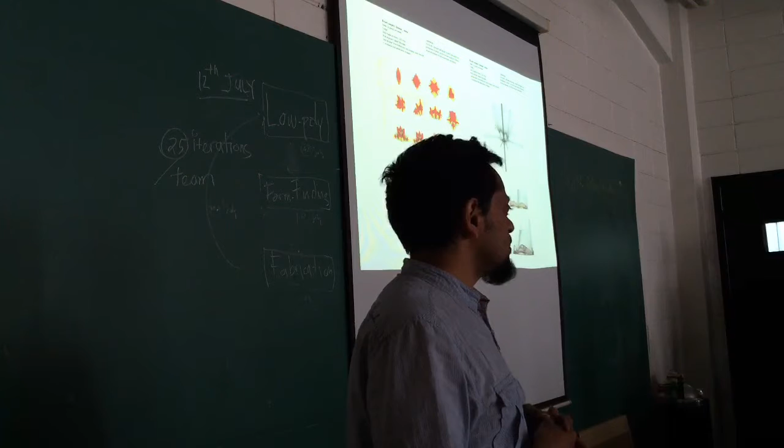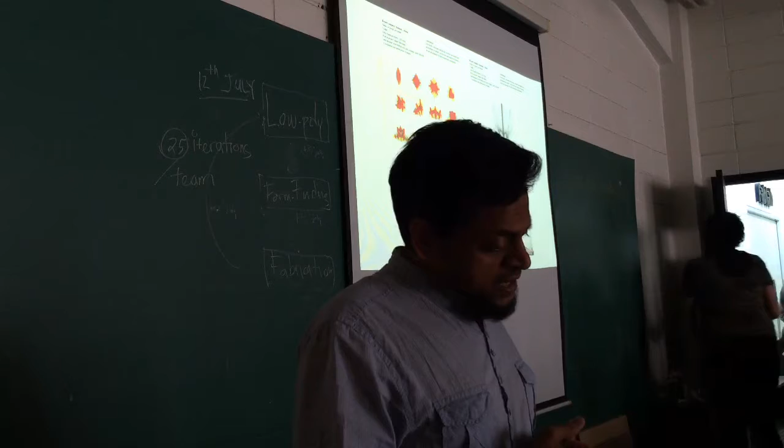So in that sense, it's a big company of smaller companies. Each team is maybe 6-7 people. The biggest team is maybe about 35 people, but they're doing airports and such. So we generally tend to do smaller projects, because we think that gives us more direct control over the outcome. We as in the computation and design group.

So this is what we're currently exploring: correlation of the expressive capacities of geometry with construction and also local materials, and how you can use technologies and appropriate them in different cultures.

I was hired to do a very specific thing, or at least I thought it was specific. They said it's an R&D group, do you want to lead it? Okay. But then the first day in the office, it's chaos. No one gives a shit who you are. No one even tells you where the files are because everyone's so into their own worlds.

So over the last 10 years, every year we think about what R&D means in a company like ZHA, because everyone is a designer, everyone is researching, everyone is extremely talented, from various parts of the world. So whatever little ego you might have had... when I joined, I was 27.

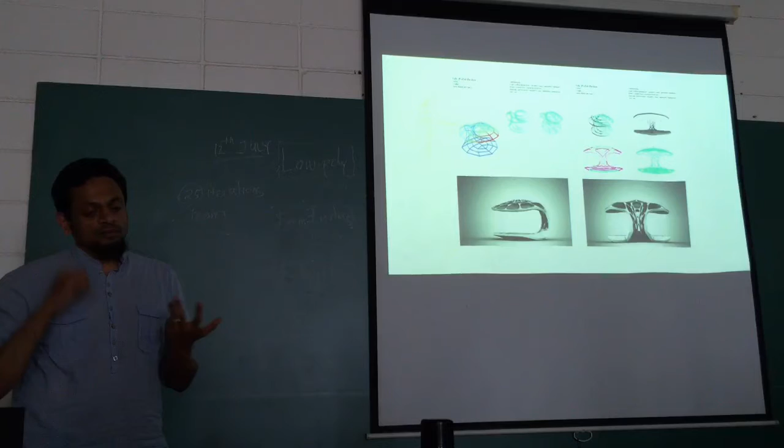Similarly, every other team in ZHA has explored a vocabulary, a method of getting it made, interfacing with clients. Yeah, so that's what I mean, that you join as young people, and over time you try to grow as designers, as architects, and develop your own. And I'm extremely grateful to both ZHA and Patrick and everyone else, in that, as a young untested person from India, there was no reason why they would want to take a risk, but they did.

And therefore the company is rich because of that risk taking, because lots of people have been in the office for 10 years, 15 years, 20 years, in charge of little teams, and that's why the company is diverse and it's rich.

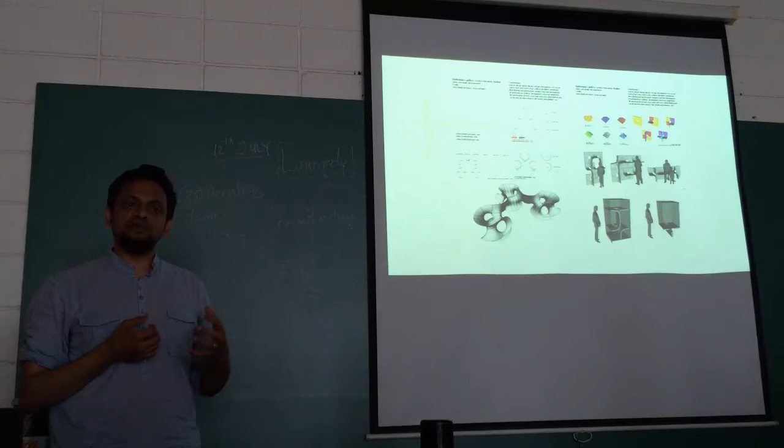Even though in the public eye, in the public image, it's all the same. Like, it's all swoopy things. It's all irreverence to culture. It's not true. That's the image which we have to maintain. Otherwise, people don't take us seriously. If we try to be polite, they will just run you over, right? So we are thick-skinned in that sense, but we're not arrogant, right?

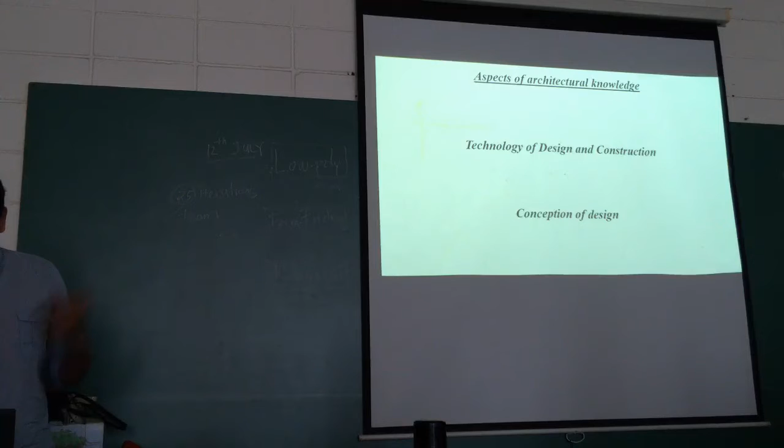Okay, so those are the range of projects that we have contributed to, but our core focus as a research and development team is to concentrate on these two aspects of architectural knowledge: deliberate production of knowledge in this technology of design and construction, like we are doing now, like Maya modeling, Rhino, scripting, programming, all those are design technologies. Construction technologies like a robot, the CNC machine, laser cutter, brick making, all of these are technologies of design and construction.

But we are equally interested in deliberate production of knowledge related to conception of design. So we don't leave it to intuition, we want to talk about it, and initially it will be crude, and then the more we talk about it, the more systematically we can think about design, it also becomes a form of knowledge, right? Design knowledge, how you conceive of design and new novel applications is also a form of knowledge that we try to focus on.

So it's not a geek club, let's say, although we do a lot of technology aspects, we do a lot of mathematics, a lot of art, but essentially we want to be good architects and grow as architects every day. So that's what we mean by technology of design and construction, things that you've been exposed to perhaps more. Modeling, scripting, like Grasshopper, machines, and so on. But this morning you also got a sense of our interest in the other side of things, the conception of design, how do you engage with these things productively to make architecture, right?

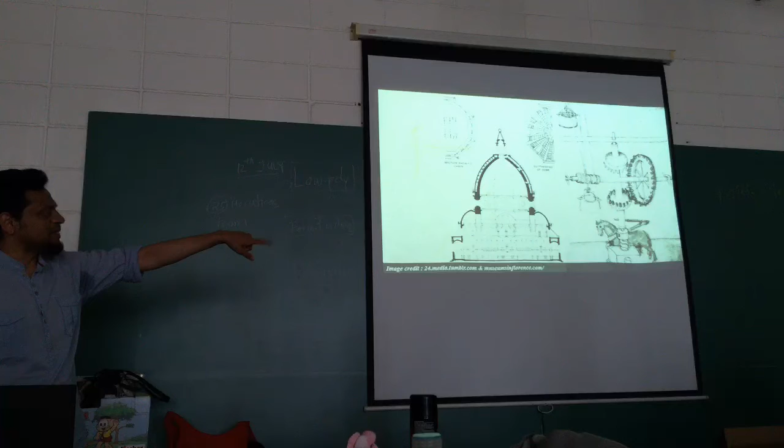Brunelleschi didn't care about styles of architecture, he didn't care about proportion, he didn't want to talk about it, he wanted to talk about how to make stuff. He was inventing machines, he was barely making any drawings, he was on site getting stuff done, and he was not an architect really, he was a goldsmith. And Alberti was kind of the father of architecture, let's say, he perfected the drawing of the perspective, he invented instruments to draw properly, accurately. Brunelleschi famously built this dome, I think in the 15th century or so, he didn't concentrate so much on drawings, but he was very much interested in making machines to enable the easy construction of that dome.

So what he invented there was a gear mechanism so that the horse can go always in one direction, and by flipping a gear, the material can be transported up or down. So the horse doesn't need to go backwards, right? So it's a differential gear mechanism that he invented for the purpose of construction of a dome 100 meters up in the sky. And you can clearly tell this is Alberti, very distinct, and you can blame Alberti for all our troubles of drawing and dimensions, which again we are saying both are important.

More than the drawing aspects, Alberti was also very much concerned with the impact of buildings on urban spaces, how putting a building in a public square is different from putting the same building in a lesser public place, and so on. So social implications of building were also important, so in that sense Alberti was a kind of architect's architect.

So more about these kind of distinctions and things you can find in Parametricism 2.0, edited by Patrick Schumacher, and a lot of people have contributed articles to this latest AD. You can perhaps find it online, or I don't know how it works over here. But there are various aspects about these new tools and new ideas of architecture, how various people are trying to tackle that.

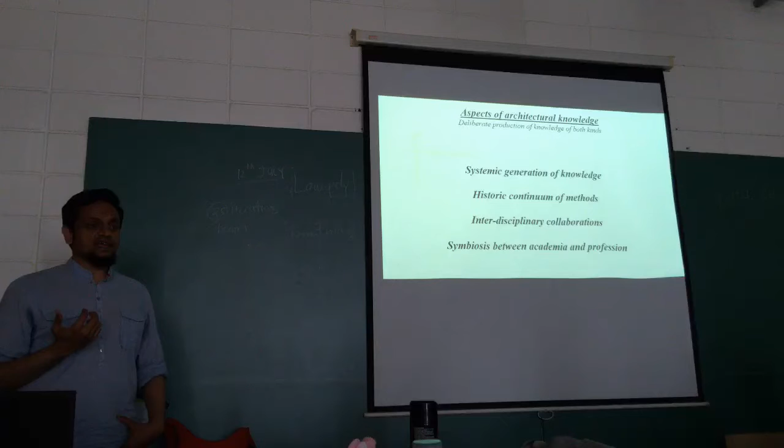So that's a spirit that permeates to a deep extent in our work. That's one of the reasons why we do these kind of workshops, to actively engage, and not only to say, this is one way of doing it, but for both directions. Every workshop we do, when we go back, it does affect things that we do. We can't explicitly say this happened because of this workshop, but over time it does accumulate, let's say.

So systemic generation of knowledge basically is something like this, right? On the one hand, you're producing geometries and spatial ideas by starting with the simplest and then slowly exploring it further and further. And on the other hand, you're also applying analytical methods to understand what you've just drawn. So analysis is not only for you to make a building stand up. It's not the engineer's job only. You as a designer can do that as well.

So you can analyze, okay, I just drew this, how is curvature changing across the surface? You can analyze how is light reflecting off of it? Or what are the spatial opportunities that a certain kind of geometry provides, and so on. So you can then build little tools to help you analyze what you have just done, right? So two aspects of systemic generation of knowledge. You are disciplined in your production of geometry and of architectural design, and you're also systematically improving your intuition by using analytical tools. Okay.

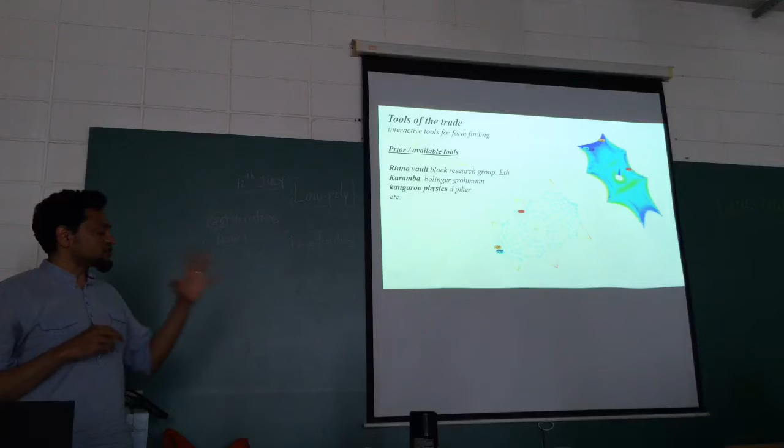Yeah, so some of these things you've already seen. We're interested in new technologies of design and construction. Sometimes we make our own tools, sometimes we use tools that other researchers are making in various parts of the world, Grasshopper, so on and so forth, right? Like this, from ETH all the way to the US. The internet is our world, so there's no point reinventing the wheel if there's already a tool that does it, we just take it and use it. And many times we also write our own tools.

In this case, while we are modeling, I don't know if you can see, but you can recognize the manipulators. While you're modeling the low poly, the simulation runs behind. It's a tool that we wrote, so it's real time, shows you the shape of the fabric. When you press 3, normally what you see is only an averaging process. So we changed the 3 button, so whenever we press 3, what you see is the shape the fabric would take if you stitched it in that way. Okay. So sometimes we make our own tools, sometimes we use existing ones.

So this workflow, you won't find a textbook for this, it's just our workflow. We take a low poly and use the subdivision surface and move the points around until either it becomes completely flat or it becomes like fabric or paper or metal, so we can construct it from fabric or metal and so on. The same way you've been modeling, converting into a high resolution mesh and then cutting it up. Sometimes we add an intermediate step: you convert into subdivision, move the points until some geometric properties are satisfied, which makes construction easier.

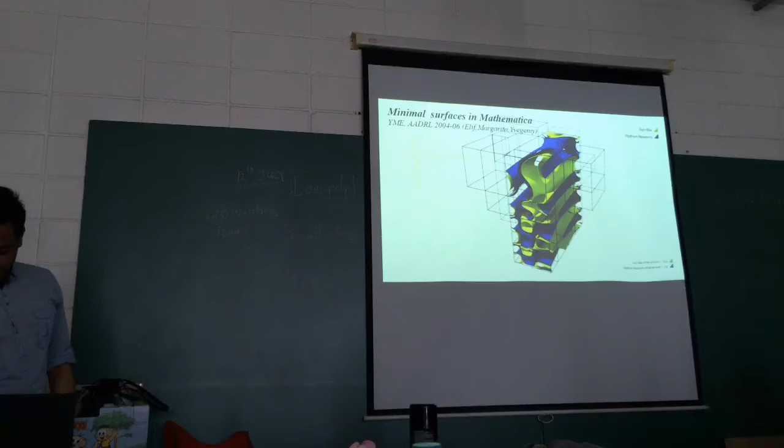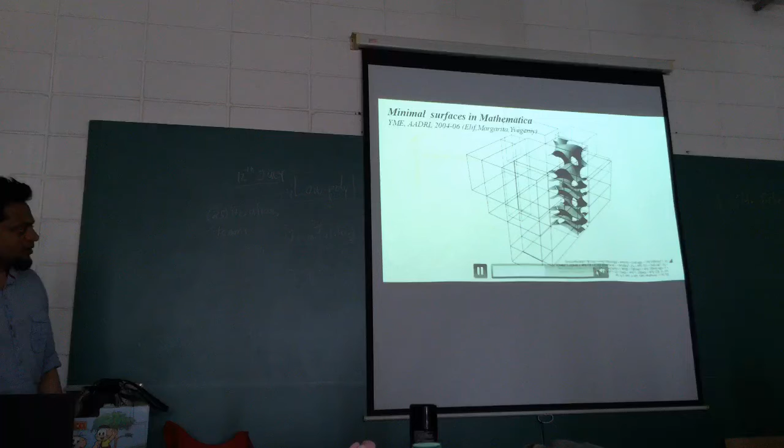Okay, so that's on the side of construction, but we're also interested in understanding curvature more mathematically. So this is a project of my colleagues when I studied at the AA, a team called YME. They were exploring these mathematical geometries and how we can appropriate them to make buildings and so on and so forth. But if you notice at the bottom there's a set of equations that pop up, right? So that entire surface is described by this silly long equation, which is useful if you're a mathematician. But if you're a designer, you're using that as a reference and you model it. Then you understand it the way you understand it. It's the same surface, but you understand it intuitively. So things that you've been doing, like modeling by low poly.

There was another project in the same year, again my colleagues at the DRL, at AA. They said, no, we don't understand the equations, but we can generate equally fantastic surfaces, crazy, just by modeling in Maya, and that's what they did. So lucky enough for us at ZHA, these two teams had already done it in 2006. So we combined both of them when we had to design the gallery for mathematics in 2014. On the one hand, we explored use of the equations to generate all these varieties of shapes, which would be very difficult to model by hand. Here, just by changing some numbers, you get very different surfaces.

But it's very difficult to adjust it to fit a space because it has its own logic. That equation doesn't care whether there is a wall in the middle. It doesn't care if it's 1 meter or 2 meters less. But we, as designers, have to care about that. So that's why we combine these two methods. One is used to explore, the other is used to make it specifically architectural, right?

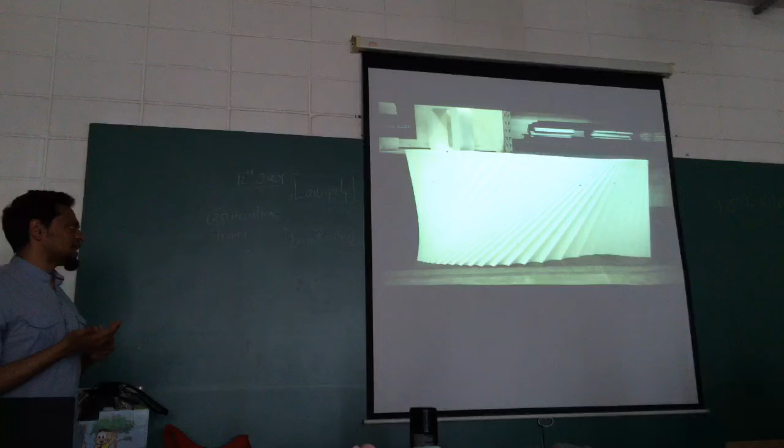What we are interested in is what can that process give us as designers? How can we manipulate that process? How can we understand that process so that we can design better? So, how can we gain an advantage against Fosters, for example? The more we know about the process, the cheaper we can make, in one sense. On the other hand, we can do more, we can express more things.

So this is the rough distinction: if you don't have hot wire cutting, the other way to do it is take a mill, a router, and scrape off everything that is not, like a sculptor would. Take a block of stone and chip away everything that's not the sculpture. That's the comparison. If you use a hot wire cutter, the same surface can be cut in 1.8 minutes versus 3 hours and 34 minutes. So the increase of efficiency is, I don't know, 100-fold.

And these are not trivial. This is not our building, of course. This is Snøhetta in San Francisco. All of that facade they milled it out. But with slight changes in that geometry, you could have hot wire cut it. And that would have made a lot of difference, right?

So this is the kind of thinking: if you have control over your geometry, you have control over your expression, you have control over the budget, you have control over how people navigate the spaces and so on and so forth. So that's why we are fundamentally interested in geometry, because that dictates a whole range of other things.

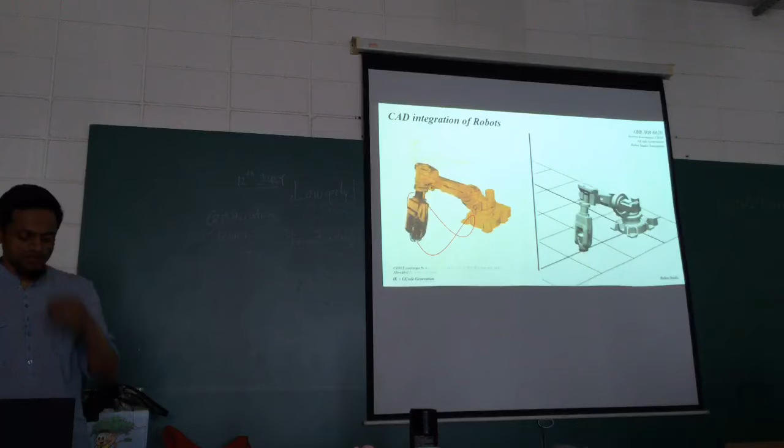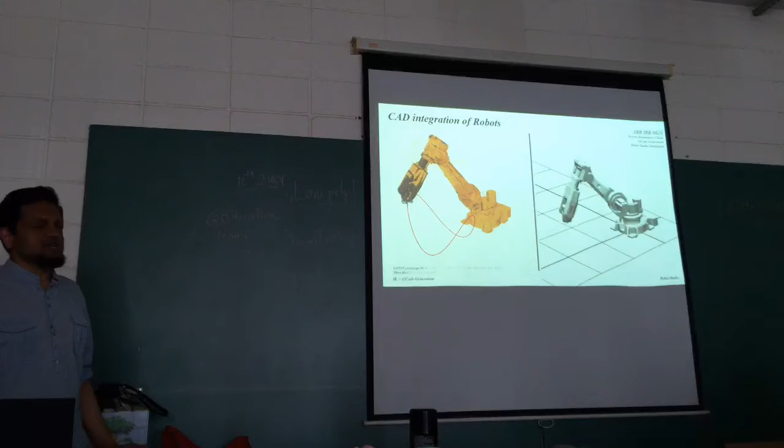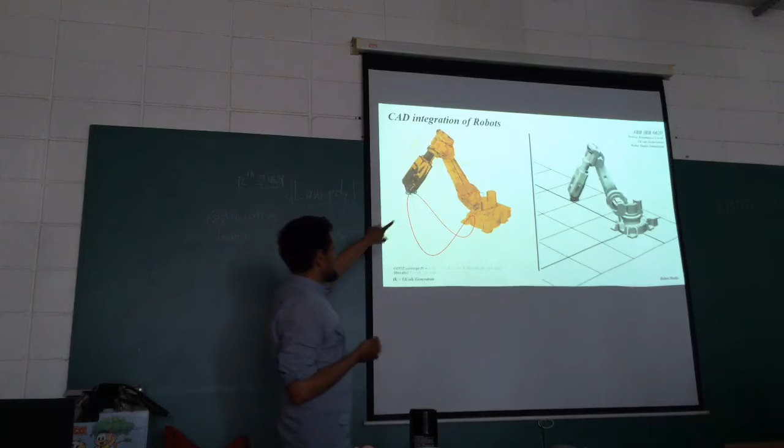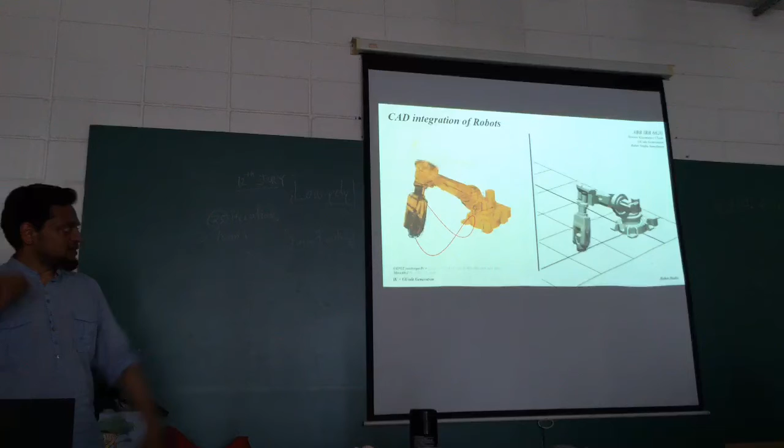So we are also building these kinds of tools, not because we want to do workshops with them, but because we want to know before we send a geometry to companies like Odico whether the robot can actually cut it, right? Every arm, the robot cannot reach every position in space. So if that's the cut we want to make, we want to know how long it will take for the robot to do that path, and so on and so forth. So on the left is our software, on the right is robot software, as you saw yesterday. That's in Maya, and that's in unusable engineering software.

So we're producing these kinds of benches with Odico. This is going to be formed by hot wire cutting foam and then casting concrete onto it.

Casting concrete, every culture is like super experts at casting concrete, and I don't have to tell Brazilians how to cast concrete, right? But making the mold is kind of interesting. You can see here, I don't know if it's visible, there are these straight lines. That's the line that the wire passes. So that's the path of the wire. And you can imagine this surface is a wire that goes and cuts it out.

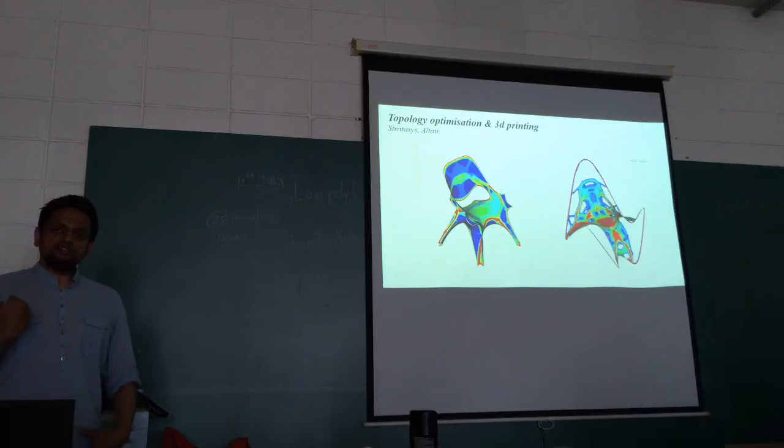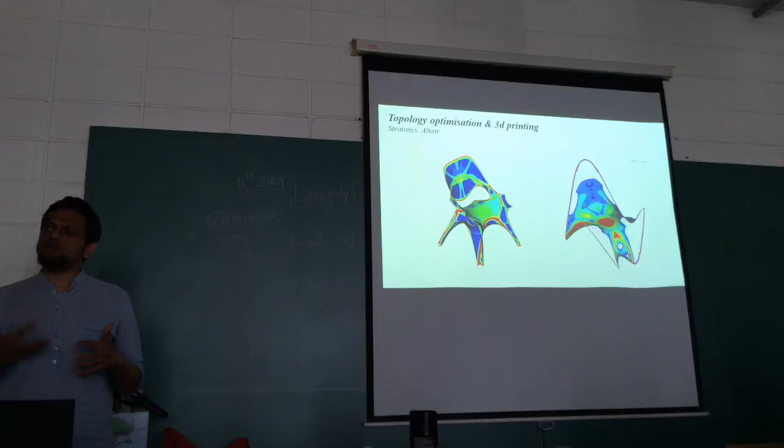So moving on. These are other technologies we are particularly interested in, things that save material. Here, it's a technology called topology optimization. It removes material from where it's not needed, similar to our bones. Our bones are not solid, right? They're thicker in some areas, thinner in others, based on the way you run or the way you walk. So it's a similar technology that removes material from where it's not needed. We develop these kinds of workflows, again within Maya, to convert that engineering information into actual 3D printed parts.

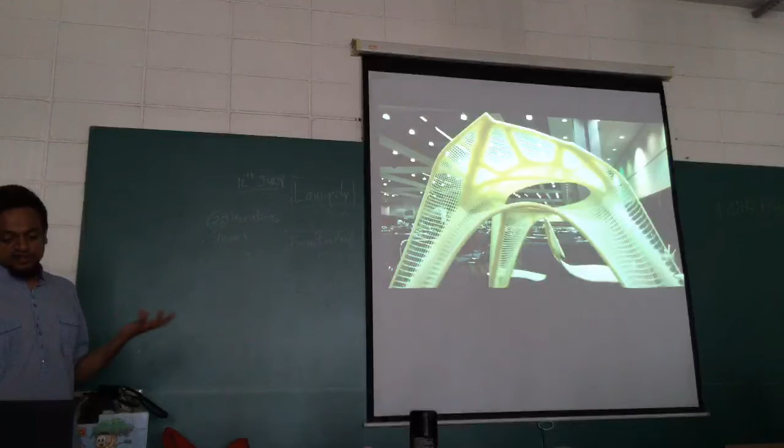So it's still not in production yet. These are all prototypes. You still can't sit on it because there are various issues. But we're already on the 4th prototype. So soon we hope we can commercially sell them. You can't sit on this, that's why there is a tape, if you notice. But we are pretty convinced that we can sit on the next one.

So with 3D printing, you can also manipulate color. The white areas are the stiffest, the hardest, and yellow is the softest. So like bone, it's not all equal density, it's not all equal strength. Some areas are hard, some areas are soft. That's why when you land, when you jump, the shock doesn't go through your body as much as it would if your bones were made of titanium. You would feel it in your skull. Every time you walk, you could hear it in your skull, right?

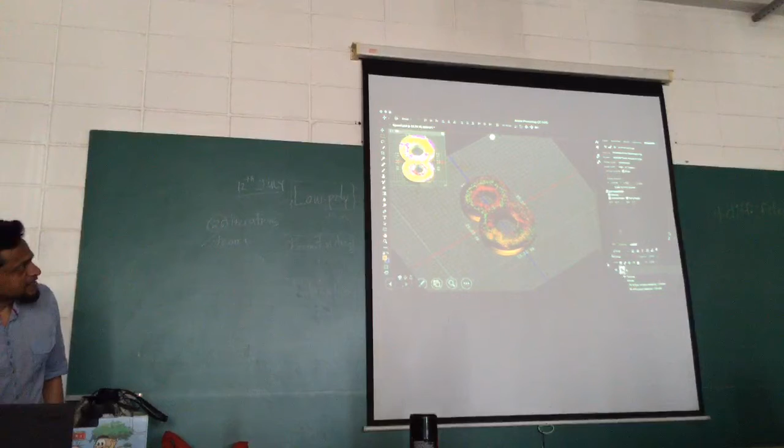From Photoshop, I don't know if you have the latest Photoshop, you can order a print. You can import an OBJ and say, I want this printed, and it will submit a print, and a week later you can get that print. And it will give you a cost. I don't know if you can see very clearly. It will give you an estimate of how much it's going to cost.

I'm not sure if the service is available here, but it's definitely available in many countries, including the US. And that's kind of exciting because you can then make a design and send it wherever, and they can get it printed. Right?

But for us, the interest is it fundamentally changes the way you design. So you're not modeling, you're not simulating geometry. In this simulation, all we are controlling is a density of material per pixel. So what looks like a solid block is divided into very tiny little cubes, and we are controlling through an algorithm whether it should be blue or white. Blue means zero material. White means solid. Right. So you're changing the way you design based on the technology and the way the technology operates.

So, for example, how many of you have done 3D printing with the MakerBot? You have to give it an STL, the STL file format full of triangles, and then it will cut it up into layers and deposit material. So that's a different printer compared to this one. That one needs geometry, this one doesn't need geometry.

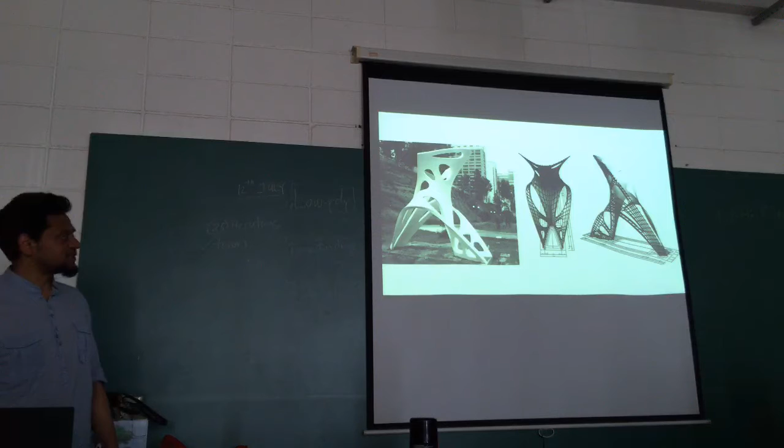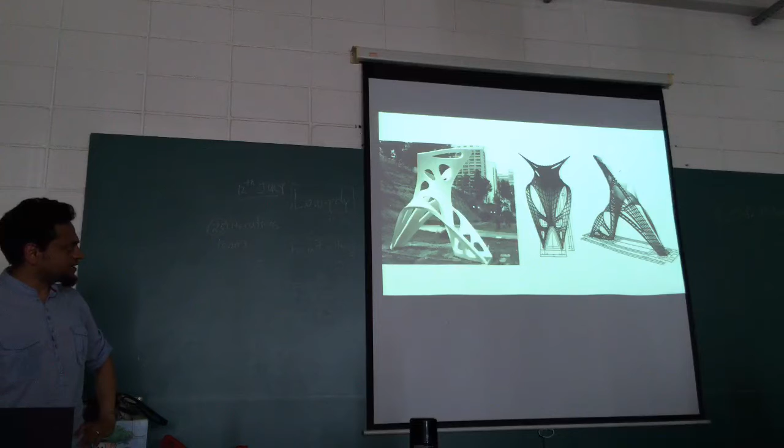Within a week you have something that, touch wood, has survived two earthquakes in Mexico City. It's about 4.5 meters tall, and the foundation is only 40 centimeters deep. Okay, I'll skip through this, this is what we do on a Sunday. But doing that on a Sunday allows us to do this on a Monday.

Because this is what excites us: the drawing, its impact on design outcomes, controlling our geometry, controlling our design output. That's what excites us, but sometimes we have to do things which are not natural for us, read these kinds of papers and try to make sense of those symbols, so that later we can control our design a whole lot more.

So here the tool is very simple. It's a tool that we built: given the red input lines, it produces the black lines. The reason we needed that is to use it as a navigational device in the gallery. The lines naturally lead people through, so you can see the 6 divisions: 1, 2, 3, 4, 5, and 6. You can't see them, but imagine them when it gets darker. 1 here, 2, 3, and the mirror.

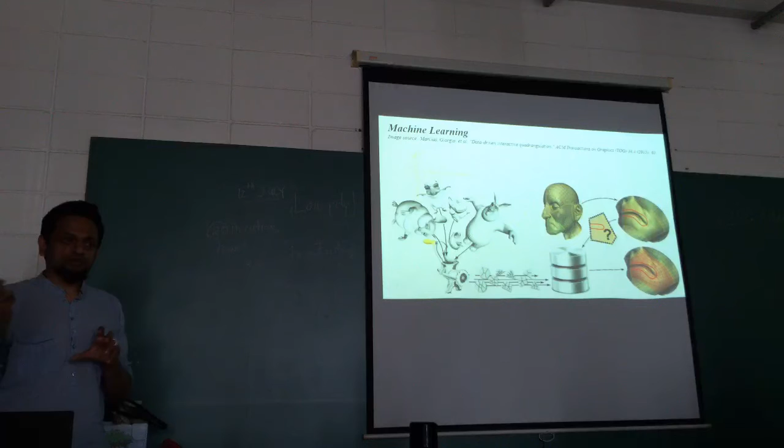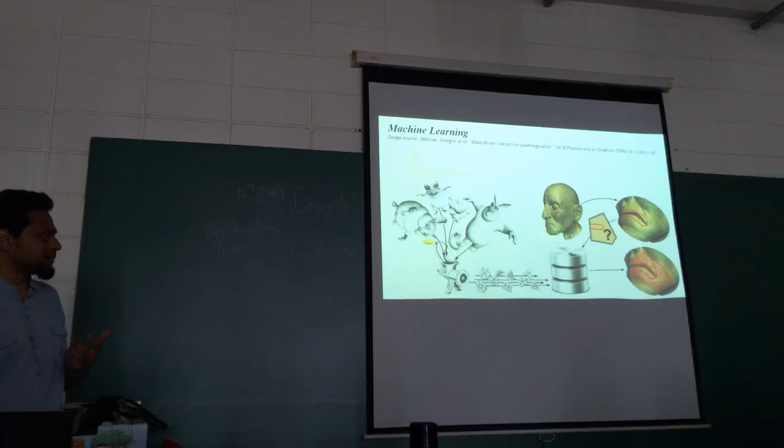You feed the computer a bunch of models that you have generated. It puts it in a blender, analyzes it, and then the next time you model something similar, it will start making suggestions. It's like, this is what you did 30 days ago, this is what you did 5 days ago, do you want to do this? Similar to autocomplete on your phone when you're texting. It's a similar thing, but for 3D geometry. So it's an exciting use of technology that was originally meant for your phone, but applied to 3D geometry. So these kind of 3D applications are of interest for us as well.

All of this, again, is applied to what we are interested in, how all of that helps us design in the virtual world, like with VR. Not only as a presentation tool, but also to explore how virtual spaces can be different, right? Gravity can be upside down, it can be sideways, you can have infinite friction or zero friction. So those are exciting things to do in the virtual space, which you cannot really do in real space. So all of that technological research or interest is ultimately geared towards a design output.

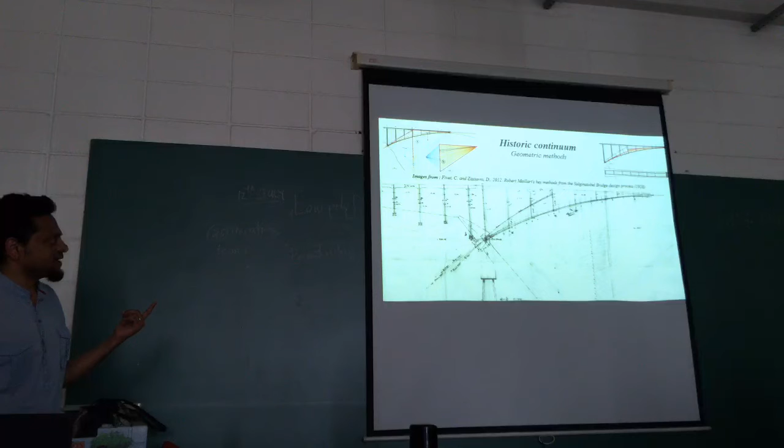So that's more or less the main research trajectories that we've been doing over the last 6-7 years. And other main interests include, as I said, connecting back to historic methods of design. So this is a method of structural design which was used to design bridges like these. But the interesting thing about that is it's not numeric.

It is purely geometric. So if you have a drawing board or AutoCAD or Rhino or whatever, you can design the shape of that bridge and also dimension the bridge accurately with just drawing tools. People like Gaudi also used these. Actually, Gaudi used this method more than he used the hanging chain, because the hanging chain is not easy to calibrate. But this method is very flexible, and lots of designers in 19th century France and also Britain used this graphical method. It's called graphic statics.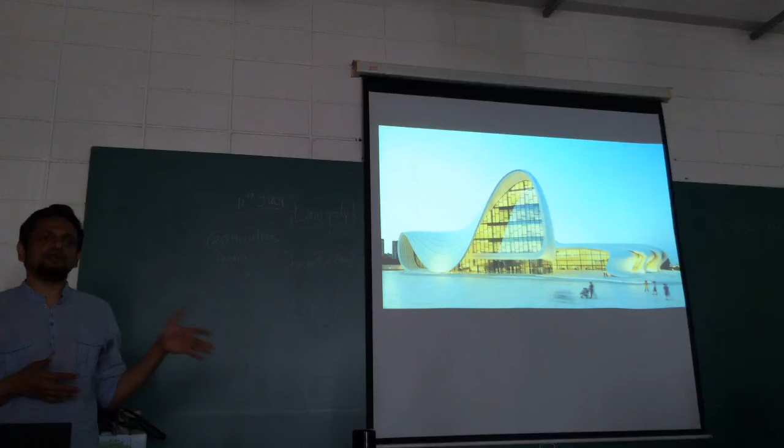Some people say that is old school ZHA, they like that one better than this one, and some people think that's too formal, or this is too formal. Internally, at least for us, it doesn't matter. It's all a continuation of a series of ideas from groups of people who joined the office at similar times, and they grow together, and hopefully in 5-6 years' time they see their first built project. I've been in the office 10 years, I've not seen a single built project yet.

But at the end, in December 2018, our gallery will be complete. So that will be the first complete design-build project. We made partial contributions to several projects, but this will be complete by 2018 or so. You can see that this is a completely different language to this, and to that. And once this is complete, it will be the first major built project for CODE in a sense.

And it's a journey that starts 6-7 years ago, with interest in shell geometry, looking up historic methods of how to design shells, finding other people in the 60s and 70s who did it, including Niemeyer and Dieste or Candela, and how they did it, and so on. It's a very fascinating, exciting world to go into, because we know at some point there will be a built project that represents your interest, right?

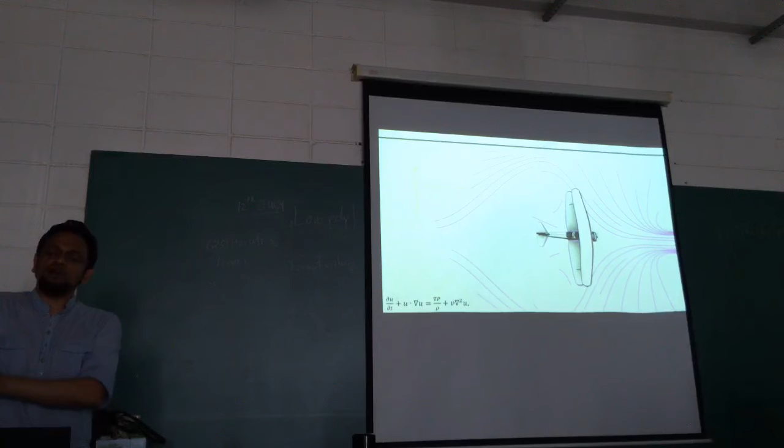Okay. So I will stop for now. Let's just leave this video. So I hope you see value in pursuing something for many years, be it an interest in modeling or mathematics or art or working with artists, or looking at other industries like computer graphics. So never dismiss any avenue. Anyone who's working in any other field, there's something that you can learn from them.

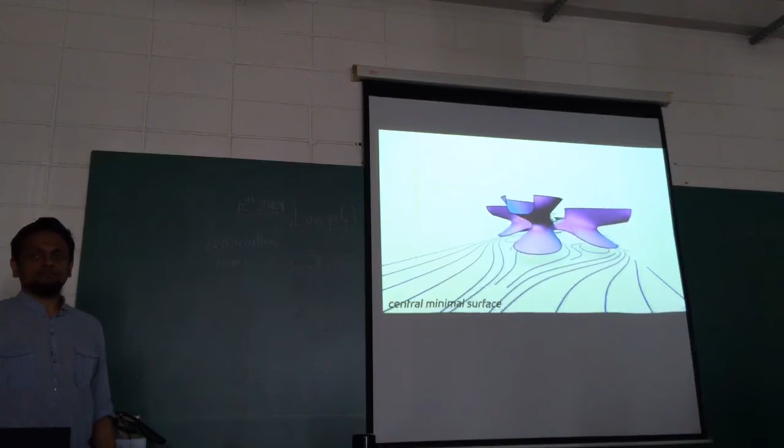And it's not that we had a game plan 10 years ago that we will do exactly all of these things. So every year, this year robots interest us, we will do robots. Next year, maybe it's something else. But the spirit is the same: always be experimenting, always be inquisitive.

And there's no reason to feel that some countries have more opportunities than others. There are different opportunities. So most of the tools that are used in the design of this one you've already seen in the last 3 days. So it's not so much about tools, it's about practice and all the other background research that really makes a project.

And to simulate that material stretching, it's in Maya also. I mean, that's not what engineers use, of course, but the shape that we generate is very close to the actual engineering shape. So it gives us enough of an idea of whether my head is going to hit it or not. So it's plus minus 5 centimeters.

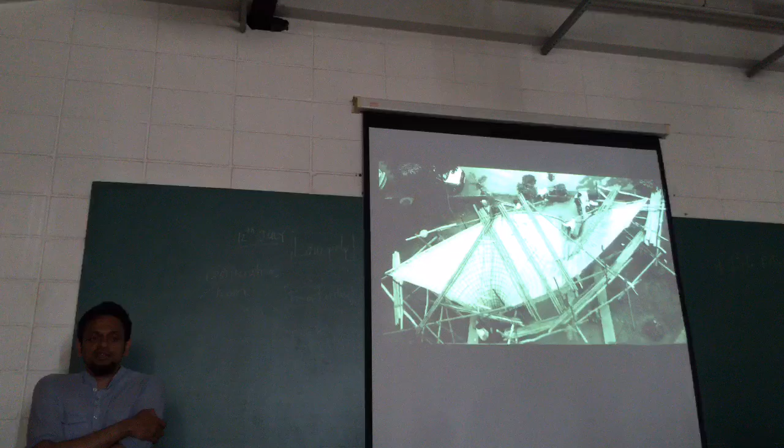But no, once you grow beyond a certain size, it's pointless for Zaha or anyone who runs the company to be involved in design, because you can't micromanage 200 people, or you can't even micromanage more than 10 people. It's very difficult, so it doesn't make sense for her. So she was involved in the overall directions of the kinds of teams she made, and collaborators she brought in, clients.

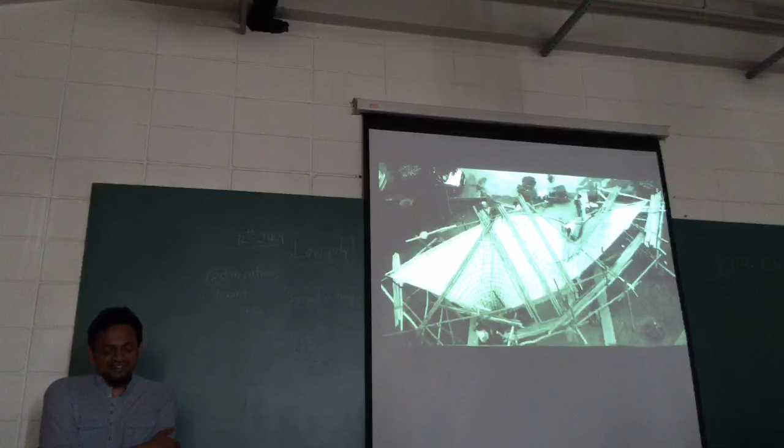She was approving or disapproving? Yeah, she was. In that sense, she was always involved, approving, disapproving projects, or mostly disapproving. She was the spirit of the company, let's say, and not the everyday.

Okay, put some video.

This is a project that we did. So this was a DRL project where using a laser cutter, you remove some material and therefore you can fold it. So it's plywood, right? Or MDF. You laser cut those patterns and you can fold it into different shapes. And then we decided to use that technique, but there was already a company in Germany that does that. So you can fold MDF into these loops by cutting material like this.

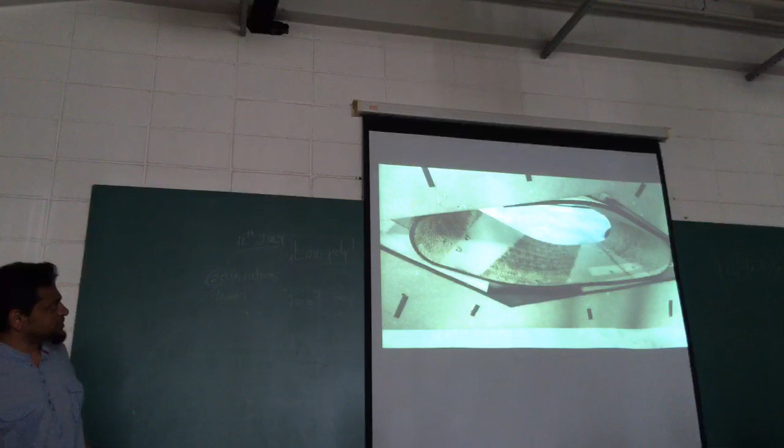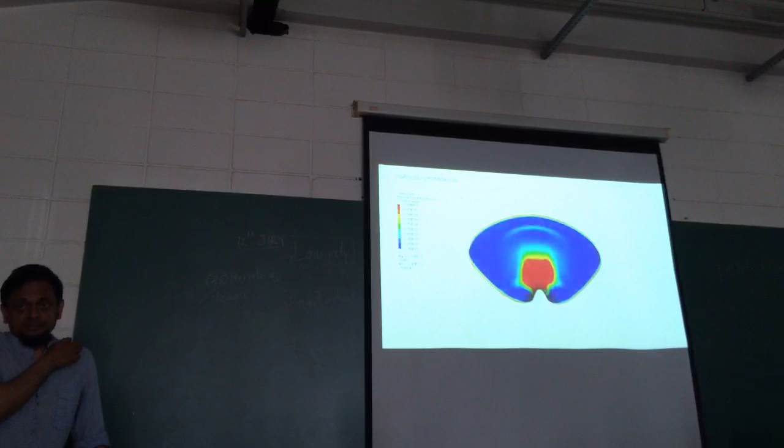And so we used that technique to make all of the loops and join them together. So again, this entire pavilion, everything was made in a laser cutter. I mean a big one, not this same size. So you can see topology optimization just to get the pattern of where the structure needs to be. And then we converted that into a mesh by low poly modeling. In this case, the red represents the most force, the area of most stress. So where there should be structure.

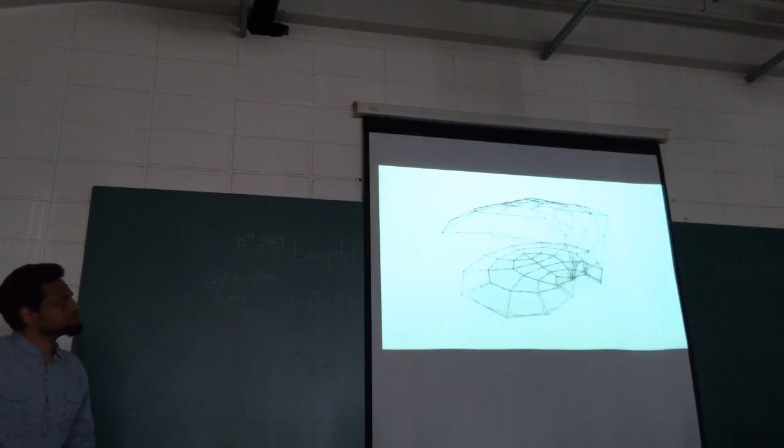And then we made these custom tools so we move the points around until everything is flat, so we can then laser cut it. If it's twisted, we can't laser cut it, right? So then we digitally make them flat by moving points around, and then everything can be manufactured in a laser cutter. Which means you have to unroll everything flat, and then all the boundaries are cut, all the laser etching is done, and then you fold it.

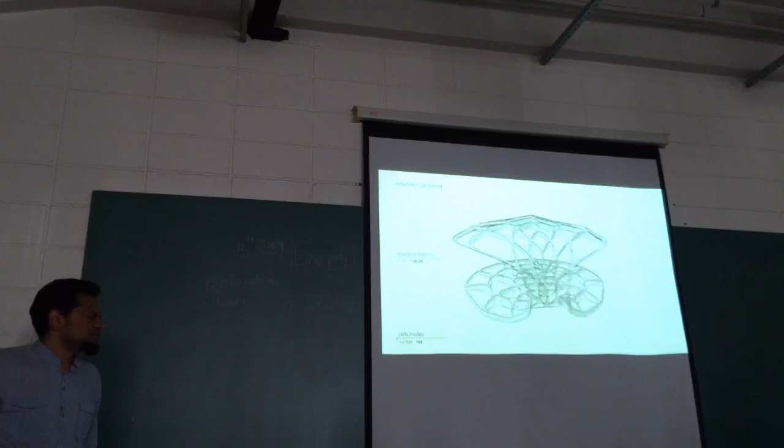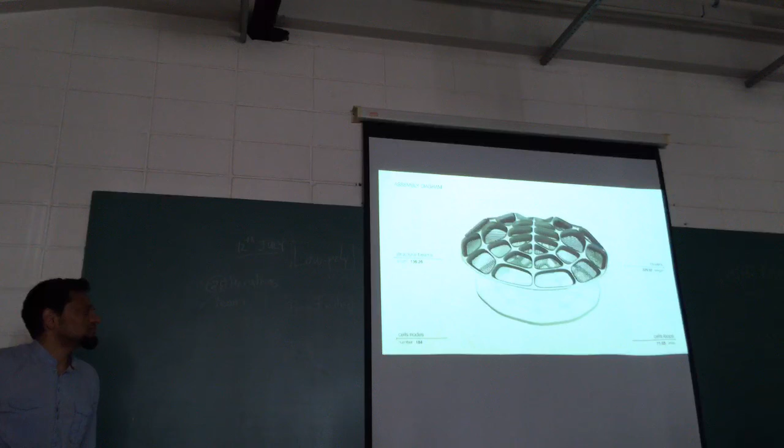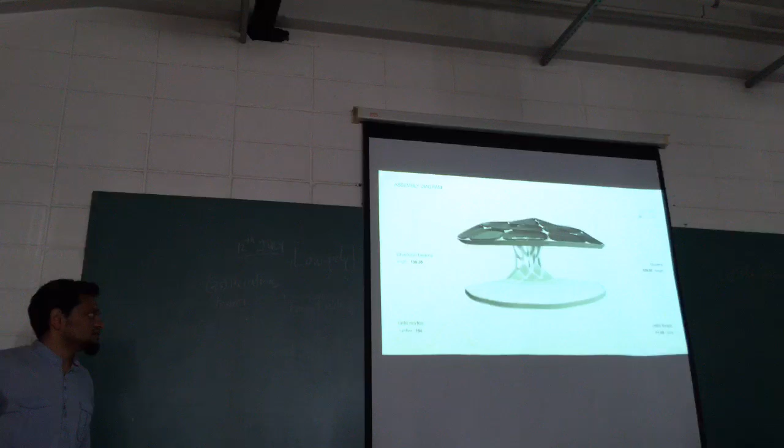So this is the underlying structure made of aluminum box sections. And the loops are made by folding plywood, MDF. And the cover plates are made by folding steel plates, taking flat sheet metal and then bending it. And the louvers are cut again, CNC. The interesting thing about this is that it was one person designing it from our end, and one person from the fabricators, doing everything digitally, and the machine doesn't care. So the assembly was a team of 15, but the design and production team was 2. So you can see all the parts are cut, assembled.

Also, a kind of interesting story. This factory is in the middle of nowhere in Germany. It's a village of 1,000 people. They had space. They bought some machines, and they're doing projects for Shigeru Ban. They're doing projects for ZHA. They're doing projects for really big companies, Jean Nouvel. They bend plywood, they bend anything that is flat. They can bend sheets, metal, fabric. So that's also very interesting, right? You just need to invest in these machines and you can do exactly the same.

And so technology is so transferable. If you get one investor, you can buy a few robots, like the Odico example. They bought second-hand robots from the car industry. In the 2008 crash, of course a lot of car industry in Holland and Denmark kind of died. So they were giving away robots for dirt cheap, for 2,000 pounds, 3,000 pounds. So they went and bought a few robots, got an investor, and set up this company. So there's definitely a lot of scope to do stuff.